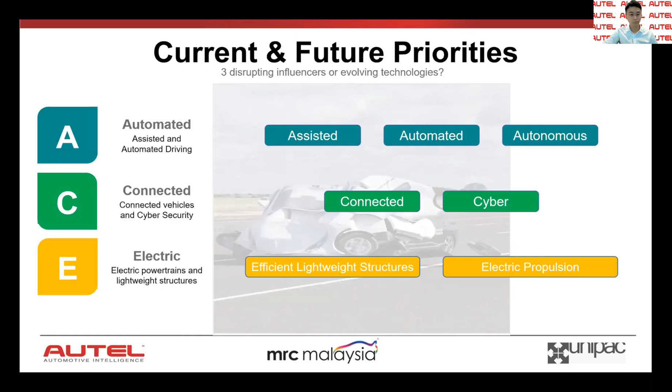Okay, next slide please. So I said this was the future, and this slide is actually about 3 years old now.

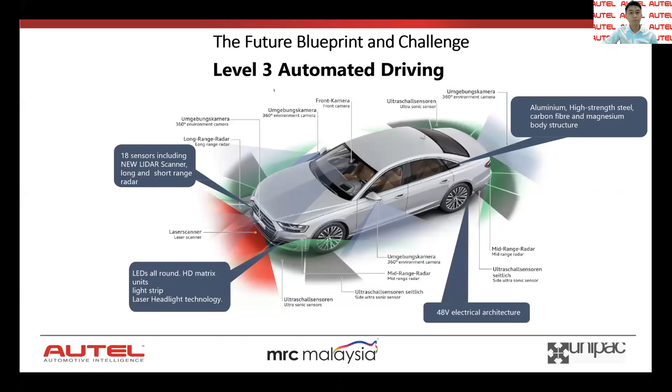So this was like 3 or 4 years ago, and this was the slide we were talking about as the future. However, if we show you the next slide, this shows you that the future is already here. Here we look at two different manufacturers, the most popular in Malaysia by far, Proton and Perodua.

We take two models, the X70 and the Aruz, and you can see on both vehicles they have a heavy dependency on ADAS equipment—whether it's autonomous emergency braking, collision warning systems, lane departure systems, cruise control, or blind spot control. So even the high volume, high consumer vehicles now are being fitted with ADAS equipment.

And why is this important to you as a member of our audience? Well, you're going to learn over the next hour or so why it's important. So we're not now just talking about the Audi A8, we're not talking about prestige vehicles. We're talking about high volume, high selling vehicles that have more and more ADAS equipment fitted to them.

As an insurance company, as a loss adjuster, and as a repairer, you need to understand the impact of that on the claims process and the repair process, and from a consumer's safety perspective. So it's not a case of thinking this won't happen in Malaysia—this is happening here.

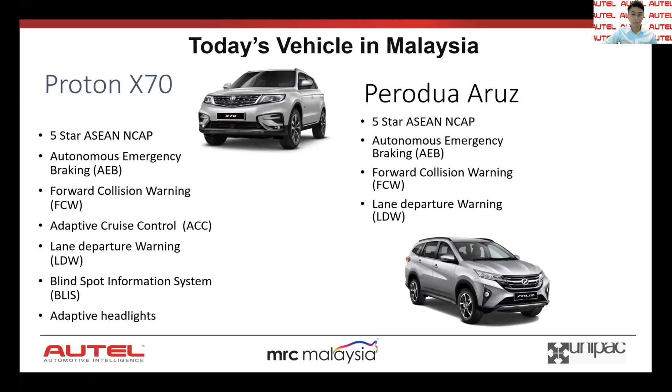Okay, alright, so I'm going to hand it over now. I'll come back later on. The experts are going to take over and explain the need for good repair technology, good repair techniques, and the importance of it in vehicle repair. Okay, all yours. Okay, thanks, Steve.

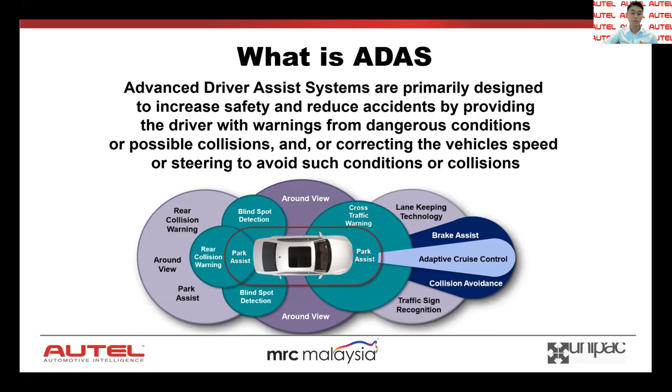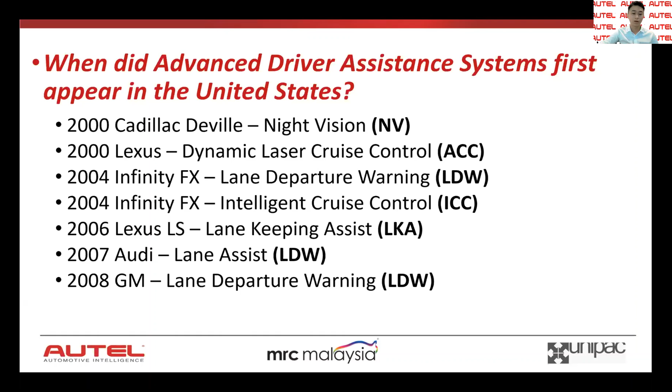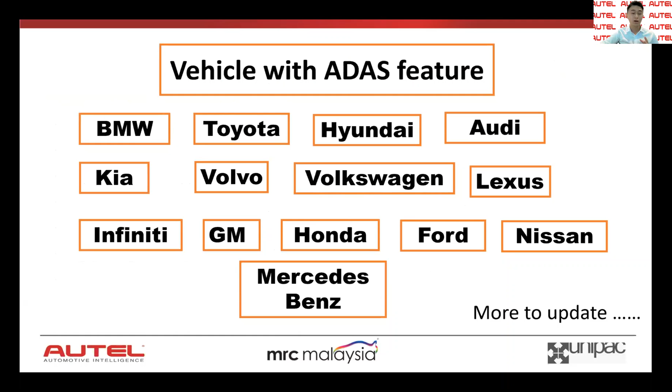A lot of vehicle manufacturers started to equip ADAS features into vehicles. So besides advertising engine horsepower and transmission speed, manufacturers are now actually advertising the ADAS feature to the user. Due to the high demand of ADAS, not only high-spec or luxury brands like BMW, Volkswagen, Audi, Benz come with ADAS system, but even Toyota, Kia, Ford, Nissan, or Proton, Perodua already have ADAS equipped as a standard feature.

From the picture on top, those are the common ADAS features usually equipped in vehicles nowadays. They are lane keeping technology, collision avoidance, parking assist, blind spot, and more.

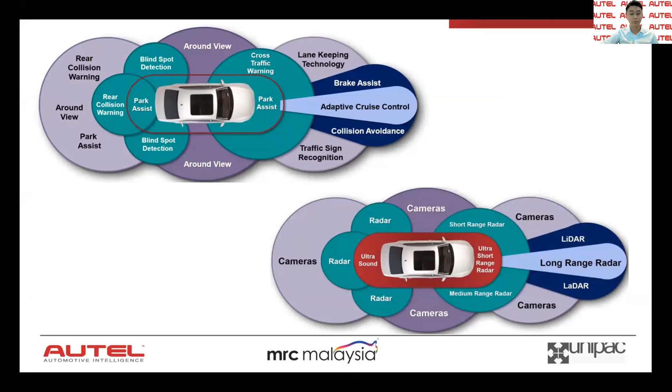Those ADAS features are supported by different types of electrical components, such as you can notice on the lower side of the picture, there are different types of radar in the market. We have short range, mid range, and long range radar. A different type of radar will be used depending on the ADAS feature fitted to the vehicle, and those radars are usually fitted on the front or rear part of the vehicle.

Next, we have the single and stereoscopic camera, an electrical component able to detect the front part of the vehicle. Most of the time, this camera will be fitted in the middle of the front windshield. Then we have the ultrasonic or sonar sensor installed around the bumper, usually in the front and rear bumper. With this sensor, the vehicle is able to detect objects around it, and also a night view camera to detect objects during night time.

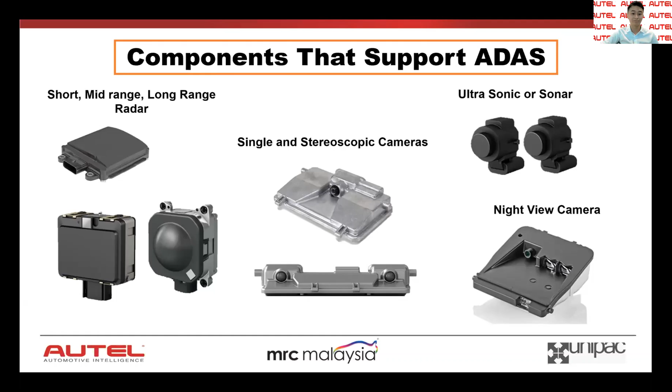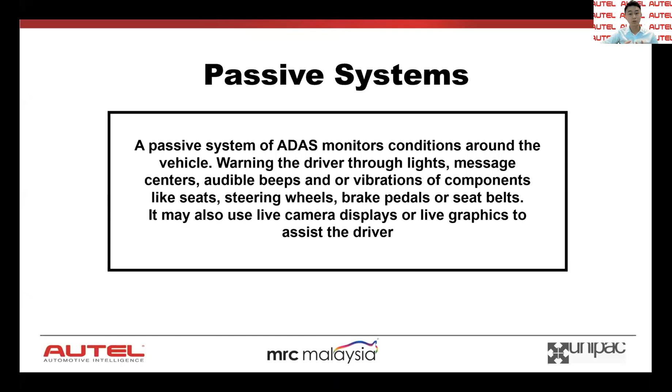Now let's talk about something more detailed about ADAS features. There are actually two categories of system in ADAS feature. One is the passive system. A passive system of ADAS feature means this feature only monitors the condition around the vehicle. It will only warn the driver by creating sound, a message on the display, vibration on the steering wheel, or some will even project the surrounding image to the driver. It only assists the driver; the system will not take any control of the vehicle.

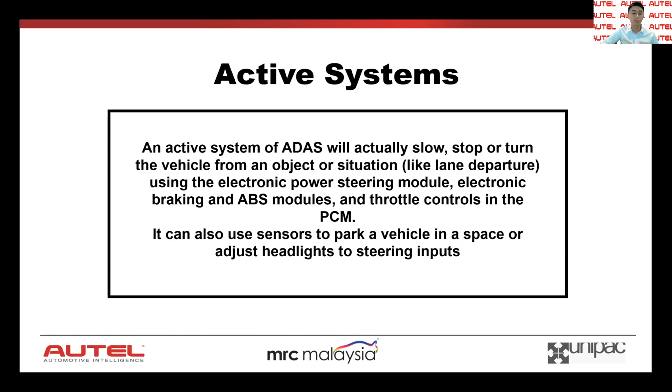Another system is called the active system. This system is a bit different from the passive system. An active system is able to take control of the vehicle. It can accelerate, slow down, or even stop the vehicle by itself. Not only that, some active systems are able to turn the steering wheel by themselves. So that is the active system.

To make everything clearer, I have made a list here. You can see there are two systems: one is passive, another is active. On the passive system, most ADAS features only monitor, guide, and alert the driver. As you can see, there's LDW, which we call lane departure warning, blind spot detection, rear collision warning, front collision warning, around view monitoring, and night vision system. All of these features only monitor, so we call it a passive system. On the active system, most ADAS features are able to take control of the vehicle.

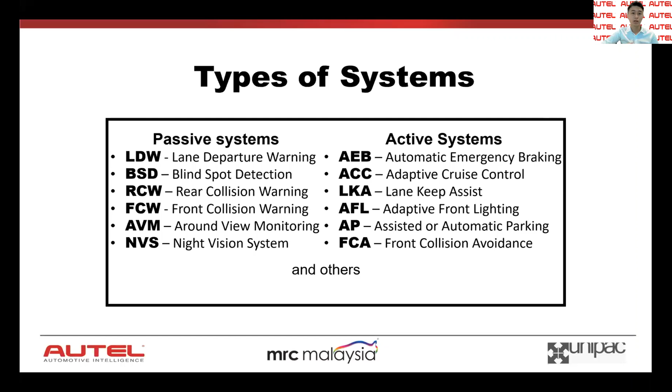It can brake, accelerate, or even turn the steering wheel. So as you can see, there's auto emergency braking, ACC - adaptive cruise control. And then we have auto parking, front collision avoidance.

So now we know that ADAS contains two categories: one is passive, one is active. Now let's talk about some common ADAS features usually fitted in the vehicle and how those features work. Understanding how ADAS features work is very important. Without knowing how the system works, a technician may not be able to repair the vehicle or may even misdiagnose the car.

So let's talk about lane departure warning. When this feature is activated, the front camera will capture the dotted line on the highway. When the vehicle crosses the dotted line, maybe to the left or right, the system will alert the driver by showing a warning sign, creating a beeping sound from the instrument cluster, or vibrating the steering wheel. So this system will only alert the driver - it will not take any action on the vehicle, meaning it is a passive system.

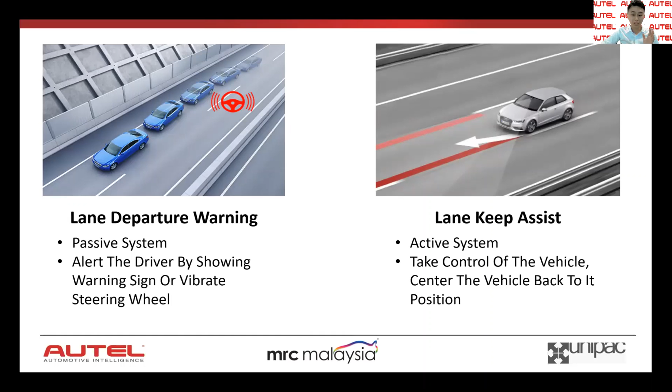On the other hand, we have lane keeping assist. This feature is exactly the same as lane departure warning, but it does not only alert the driver by warning indicator, beeping sound, or vibration on the steering wheel - this feature will take control of the vehicle. It will correct the vehicle's position according to the dotted line, turning the steering wheel by itself to make sure the vehicle stays between the dotted lines, meaning lane keeping assist is an active system.

Next, we have the traffic sign recognition system, a passive system. To have this feature, the vehicle needs a front camera to record the signboards on the roadside. Once the signboard is detected, it will project the image to the driver on the central display or in the instrument cluster. As we've gone through lane departure warning, lane keeping assist, and traffic sign recognition, without a front camera these features would not be able to function. This front camera is usually fitted in the middle of the front windshield.

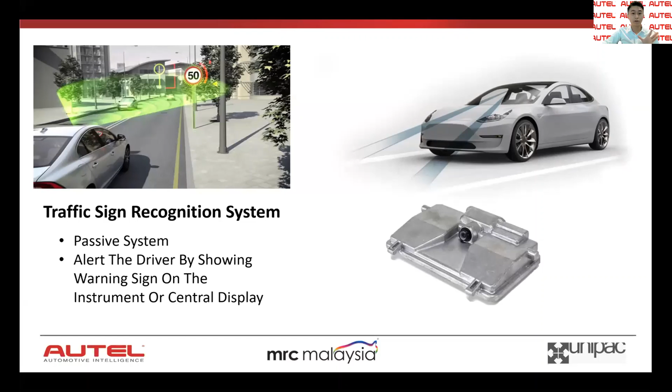Now let's talk about adaptive cruise control, also known as ACC. I guess a lot of people do know about this feature. Most of the luxury brands in Malaysia like BMW, Audi, Volkswagen, or Benz do come with this feature. So how does ACC work? When ACC is activated, the vehicle will cruise by itself according to the speed and distance set by the driver. When an object is detected in front of the vehicle, it may slow down the vehicle by itself. So now you know that ACC is actually an active system because it drives the vehicle by itself.

Auto emergency braking is an active system. This system will constantly monitor the front part of the vehicle. When an object is detected in front of the vehicle that will cause an accident, this feature will alert the driver and will slow down or even stop the vehicle to prevent the accident. Also in Malaysia, I guess Perodua might be fitted with this auto emergency braking, so it's getting more common in Malaysian local vehicles.

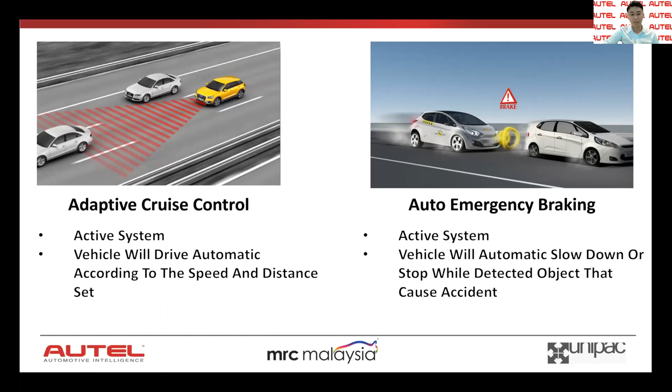But this does not mean that all adaptive cruise control and auto emergency braking systems only use radar as a supporting component - some manufacturers do use a front camera as a supporting component also.

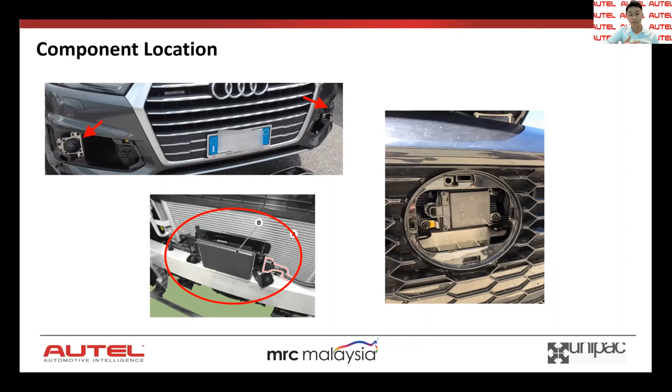Okay, then we have the blind spot detection. Most of the time accidents happen due to changing lanes, because the driver is unable to view certain angles from the rear part, from the side mirror. So car manufacturers add blind spot detection features into their vehicle, by installing two pieces of radar, one in the left, one in the right, usually at the back, so the vehicle is able to detect objects in the blind spot area.

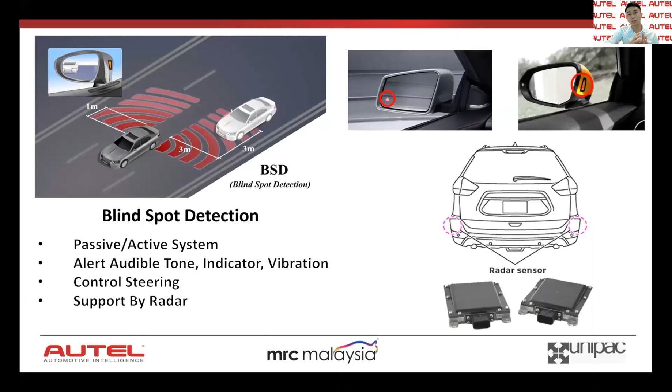It will alert the driver by showing indicator lights on the side mirror or maybe on the instrument cluster. Some even create a beeping sound. Certain blind spot detection features are able to turn the steering or even brake the vehicle. So when there's an incoming vehicle from the blind spot area and the driver tries to cut into the lane, this blind spot detection is able to prevent that, meaning it will turn the steering back or even brake the vehicle to prevent the accident from happening.

And then we have the rear collision warning. This is a feature that will alert the incoming vehicle from the back and also notify the driver that a collision is going to happen at the rear part of the vehicle. They will flash the hazard warning to notify the incoming driver that a collision is going to happen if he does not react. Other than that, showing a warning at the instrument cluster also alerts the driver that a collision is going to happen.

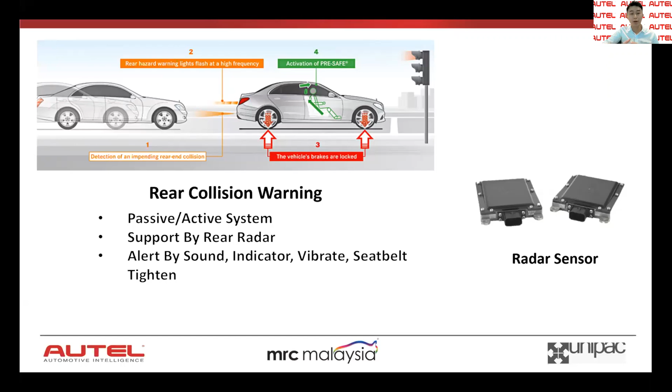Besides an alert from the side mirror or instrument cluster, some rear collision warning systems are able to take action. Once the system confirms that a collision is going to happen, it will hold the brake, meaning it will clamp the brake system. It will also align the driver and passenger seat and tighten up the seat belt. This is what we call collision preparation. By doing this, it's able to reduce injury during the impact. So this is the rear collision warning feature.

And then we have the 360-degree camera, or some manufacturers call it all-around view monitoring. It's one of the passive systems in ADAS. It will assist the driver by projecting the vehicle's surrounding image on the central display. This feature uses up to 4 cameras to support the system: one in the front, one in the rear, and both side mirrors, underneath which they have a camera to make this happen. So there's a 360 view of surrounding images.

And then on the right side, we have auto parking. Most of you are familiar with this because our Proton X70 comes with this feature - the car can park by itself. This feature is an active system, using ultrasonic sensors and some radar to perform it, able to detect surrounding objects. So if there is an empty space that can fit the vehicle, it will park by itself by controlling the steering wheel or maybe the throttle.

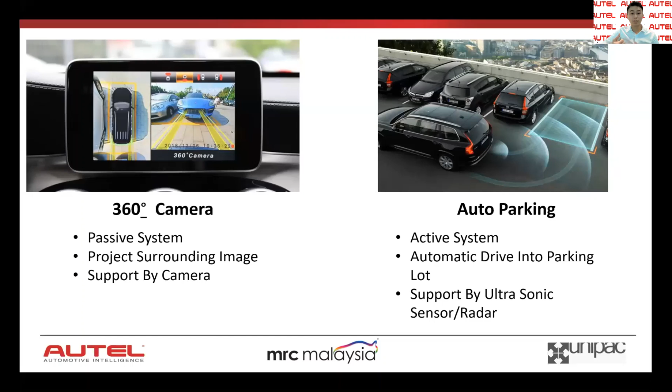And then we have the night vision system, a passive system. This feature is able to project the front image on the instrument cluster or central display. They are using a thermal camera, able to detect objects during nighttime, so the driver can spot objects easier during nighttime.

Then we have the head-up display. It's usually installed in front of the driver, in front of the driver dashboard. This feature will project certain details on the driver's windshield, such as vehicle speed, mileage, navigation, maybe some lane departure message. Different manufacturers will have different kinds of messages.

So we have gone through about 12 common ADAS features in vehicles nowadays. That doesn't mean there are only 12 kinds of ADAS features in the vehicle - actually there are more ADAS features. This is because ADAS is able to provide a better driving experience and also reduce the accident rate, meaning it increases the safety level. This is why ADAS features are becoming more common in vehicles nowadays.

So another frequently asked question: what if the ADAS system fails? What if the supporting component like the camera or radar is damaged or replaced? Do they need to perform calibration? And how do they perform the calibration?

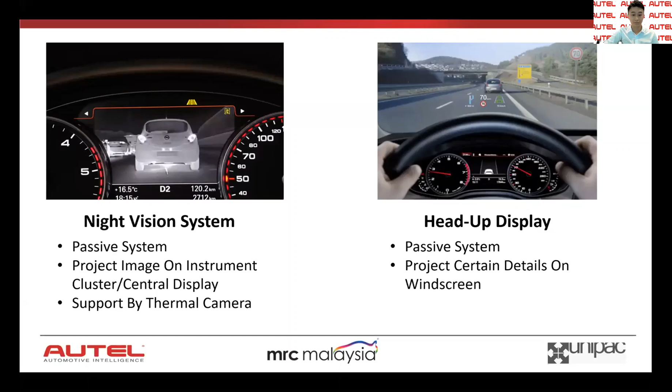Let's make an example here of a camera and radar - when do we need to perform calibration for camera and radar? As I mentioned, the front camera is usually fitted in the middle of the front windshield. So most of the time, when a technician replaces the windshield, he or she might remove the front camera for better access to work. After a long period of removing the camera from the system, the calibration in the camera might be lost, and this will cause some ADAS features to become inoperative.

So by the time we install everything, we need to perform calibration to calibrate the data back to the camera. So what if after we install the camera there is no warning sign appearing on the instrument cluster, or when you do a scan there is no fault? Do we need to perform the calibration?

To make sure the ADAS feature works in optimal condition, we advise performing a recalibration. This is to make sure the system works the same as when it came out from the factory.

Then we have the wheel alignment. A complete wheel alignment needs to be performed before any kind of calibration, to make sure the vehicle steering is straight ahead.

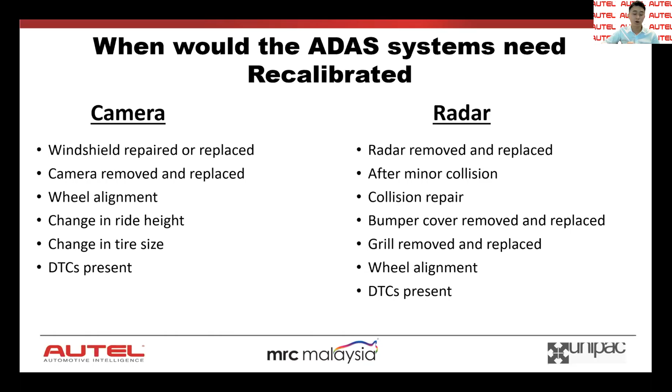Or when we have a minor collision and do a collision repair where we remove the bumper, we need to perform calibration because most of the time the radar is attached to the front bumper, the rear bumper, or sometimes attached to the crash bar.

So what do we need for ADAS? What kind of tools do we need for ADAS calibration? To begin, we need a diagnostic tablet, a scan tool that's able to perform calibration on the vehicle we want to service.

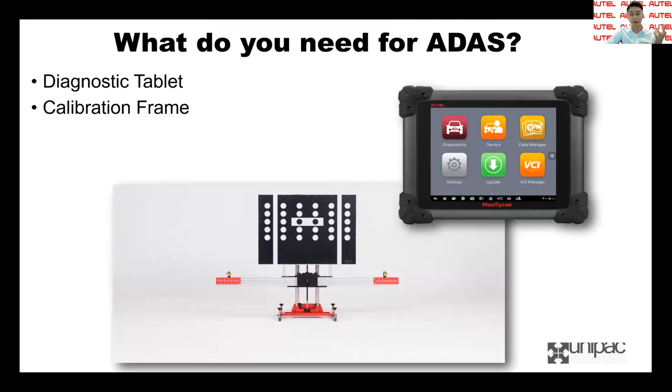Second, we need a calibration frame that's able to hook up the target board, the reflector, the calibration accessory. The third will be the target boards, patterns, and calibration accessories. And last will be the step-by-step calibration procedure and measurement specification.

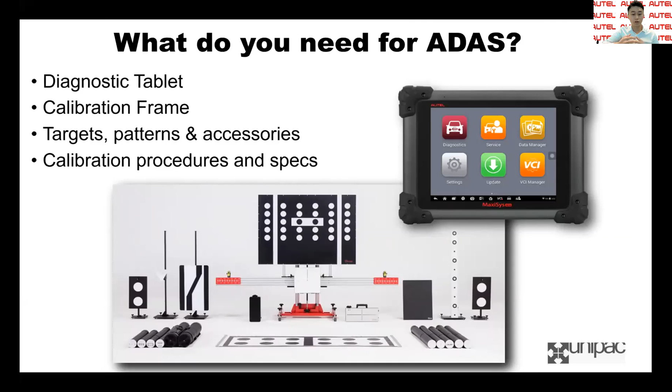In order to perform the calibration accurately, we need all of these tools. The good news is Autel's ADAS calibration system includes all of the above - the step-by-step illustrated calibration procedure with all specified measurements is included in our diagnosis tablet.

So what kind of calibration frame do we need? Most workshops will ask this. If you are performing ADAS calibration in a fixed location, meaning you only perform calibration at your workshop, we advise owning a stationary calibration frame.

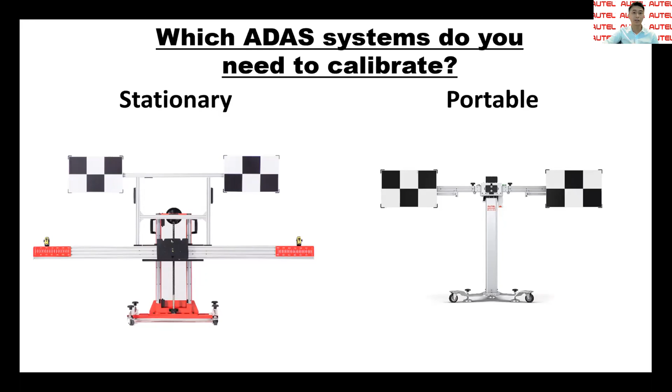Or if you are performing calibration around the state or around the country, we advise getting a portable calibration frame because it's able to be folded and packed into your car and carried around with your vehicle.

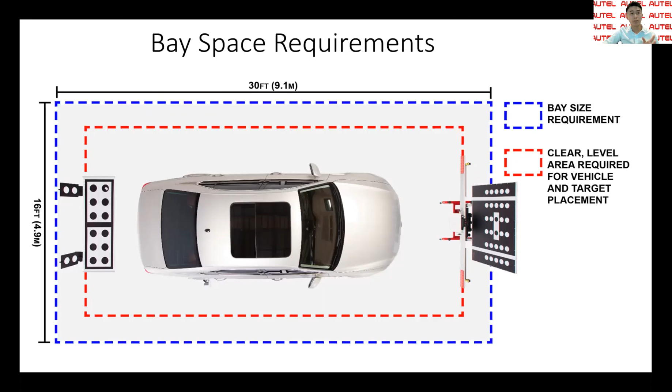Most of the time calibration needs to be performed on a flat surface in an empty space. Every manufacturer has different space requirements - some need a larger space, some need a smaller space. Autel comes with a minimum standard bay space to perform calibration: about 30 feet by 16 feet of empty space.

Besides an empty space, we're also able to perform calibration on what we call a 4-post hoist, also known as the alignment hoist. The only thing we need to watch here is the space in front of the alignment hoist.

Some manufacturer calibrations may need the calibration frame set up about 4 meters away from the vehicle, some need about 2 meters. So we advise customers to prepare at least 2 meters of empty space in front of the 4-post hoist.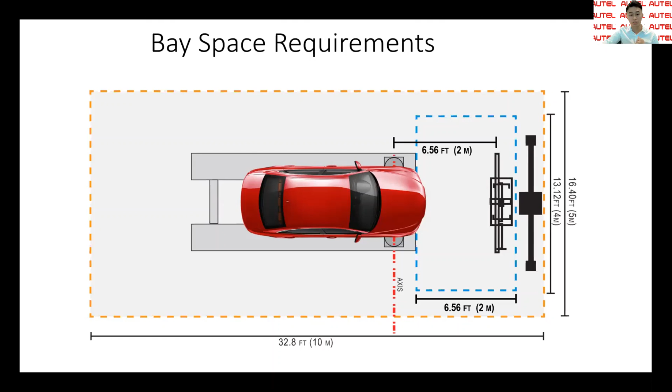What if we perform an all-around view calibration? For certain models like Ford, their all-around view monitoring calibration may require a bigger, larger space - maybe 25 by 40 feet of empty space.

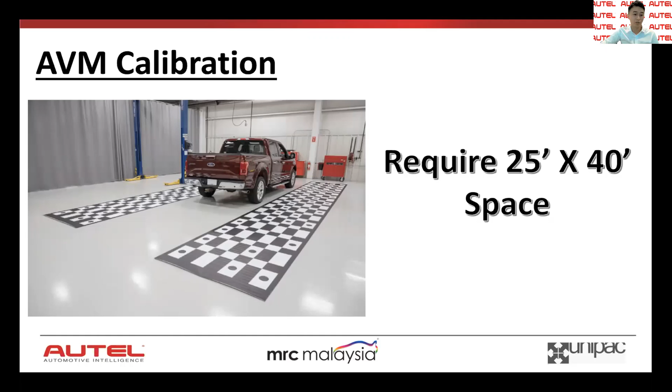A lot of workshops say they don't have this kind of empty space - what can we do? To counter that problem, we can actually perform the calibration outdoors, but we need a flat surface. We need to make sure the road condition is level and flat.

So we've gone through why we need to perform calibration, what kind of tools we need for ADAS calibration, and the space requirements. Now we are going to talk about ADAS calibration methods.

ADAS calibration actually contains two methods - one is called static calibration, the other is dynamic calibration. Static calibration means we perform calibration while the car is stationary. We may need to set up the calibration frame, the targets, the reflector, or other calibration tools at a specified location.

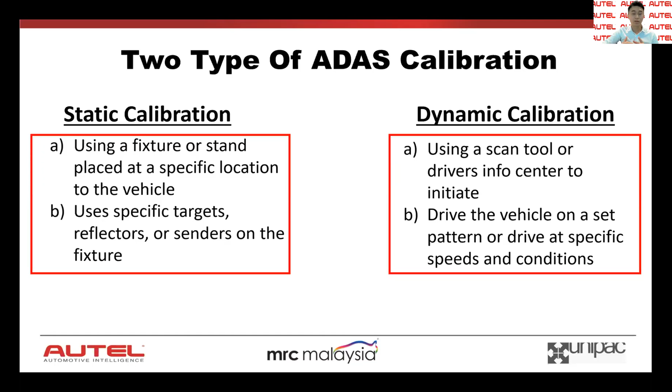Only then are we able to perform the complete calibration - we call this static calibration. Dynamic calibration, on the other hand, does not need any calibration tools. It only needs a diagnostic scanner or scan tool to initiate the vehicle's calibration mode and drive according to the set pattern requested by the scan tool, meaning we perform dynamic calibration while driving the vehicle.

Okay, so when we perform static calibration, there are some important requirements we need to alert. The first thing will be the surrounding lighting. So during calibration, we do not want any strong exposure of lighting on the front windshield.

When there's a reflection on the windshield, the percentage of failing for the front camera calibration will be high. This is because the front camera is unable to capture the target board image. And then the background of the calibration frame must not have any windows or metallic object. We need to calibrate on a flat surface or level surface.

We need to use the correct calibration target patterns and accessories needed for the vehicle, because some vehicles might use different kinds of calibration tools or targets. So we need to alert about it. And last will be the calibration procedure and specification, meaning we need to set our calibration frame how far away from the car and what is the height to set the targets.

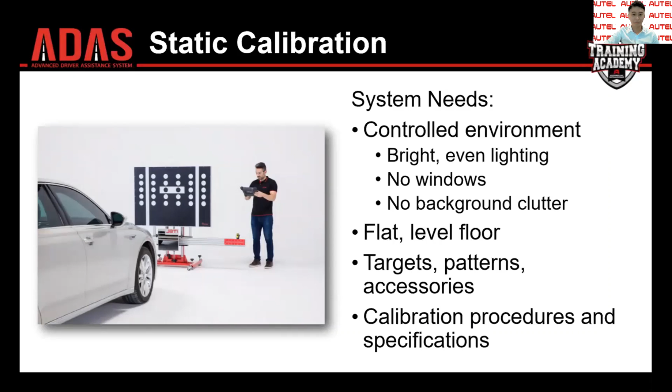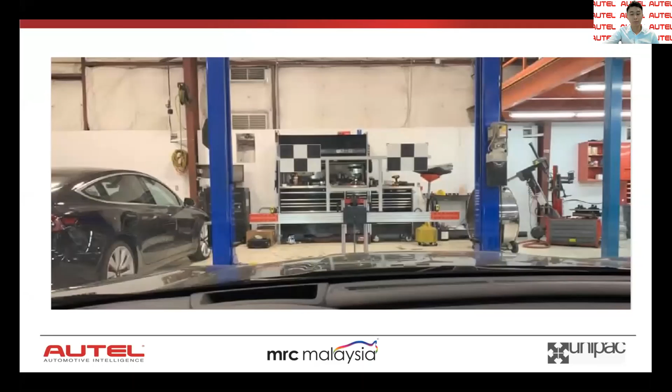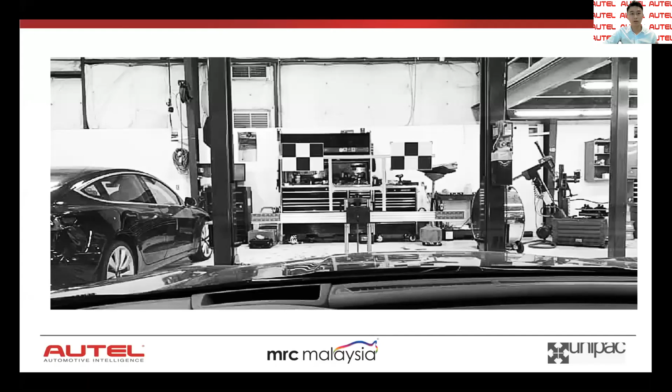As you can see on this picture, this is the image captured when we perform calibration at the front camera. So I guess most of you also have no idea where the actual target box needs to be captured. To handle this situation, what we need to do here is either remove all the metallic fan parts, workbenches, or we could apply a piece of white cloth behind. So we cover the background with a piece of white cloth or panel to make sure there is no metallic object around.

Okay, so how about dynamic calibration? What do we need to alert? First of all, we need to perform dynamic calibration in good weather, meaning not a rainy day, not during nighttime. We need to perform it during the daytime. We need to make sure that there is lane marking on the highway so that the front camera is able to capture the dotted line.

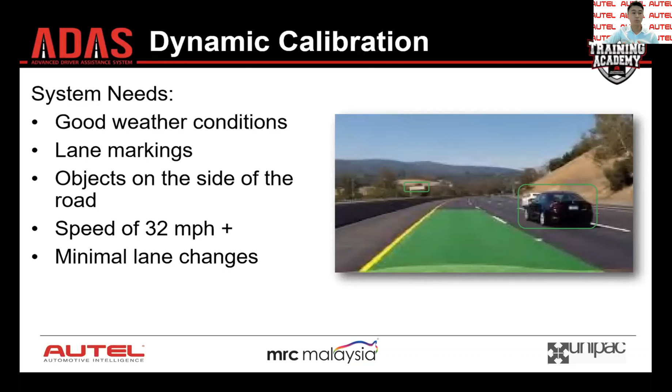Some dynamic calibrations need to detect objects around. So we need to make sure there is a vehicle on the highway, but we should not perform the calibration during traffic hours. This is because there is a minimum speed we need to achieve to perform certain kinds of calibration. Also, we need to minimize lane changing as much as possible.

Okay, so certain brands or models like Honda, Subaru, Hyundai, or Kia need to perform both calibration methods to complete the whole calibration process. Meaning we need to perform static calibration first, and after it completes with the calibration frame, we need to proceed with dynamic calibration.

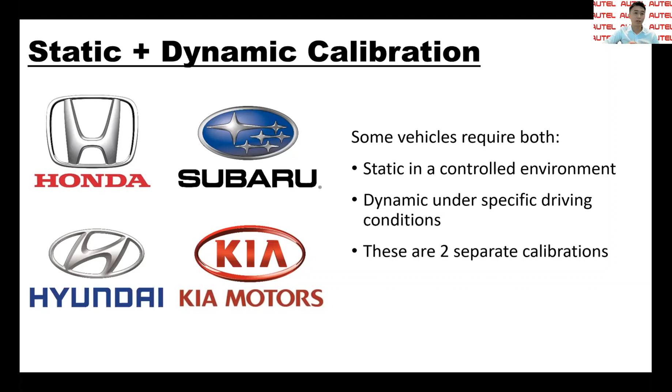We need to drive the vehicle according to the requirements stated in the tools. So there are two separate types of calibration that need to be performed, but it's only for a certain amount of vehicles in the market. Not every vehicle needs that.

Okay, so a lot of people ask, can I perform all the calibration in dynamic mode? They don't want to perform static calibration because they do not have the calibration frame or the target boards. So the answer will be no. All the calibration methods are actually fixed by the manufacturer.

As you can see on the chart, there are 56% of vehicles in the market that need to perform calibration in a static way. 37% of vehicles in the market need to perform calibration by dynamic method. Only 5% need to perform both, meaning after static we need to perform dynamic. And 2% of vehicles in the market can choose either one, static or dynamic.

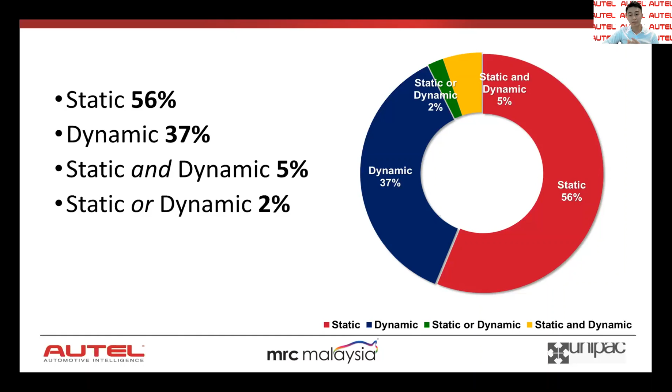Okay, so since I mentioned on the previous slide, there are 56% of vehicles in the market that perform calibration using the static calibration method, Autel does support a high coverage of static calibration.

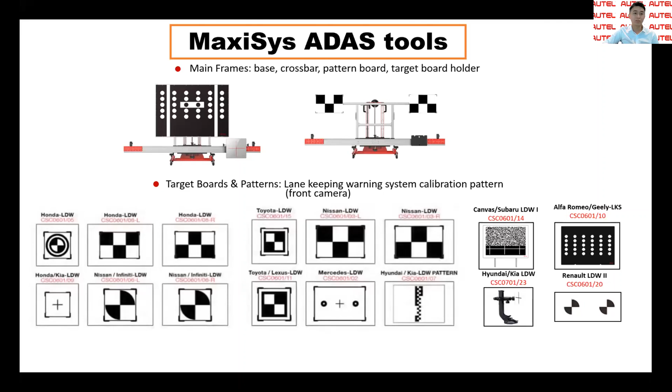We have a wide range of front camera calibration target boards, covering European, US, and Asian vehicle brands. As you can see on the slide, we have Honda, Toyota, Nissan, Mercedes-Benz, Renault, Alfa Romeo, Volkswagen. In the future, we are going to have more kinds of target boards.

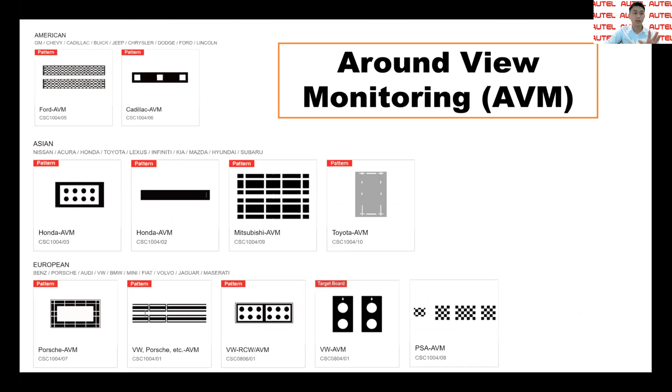We also have the all-around view monitoring calibration patterns, known as 360-degree calibration, for Porsche, Volkswagen, Toyota, Mitsubishi, and others. And for rear collision warning, we also have Mercedes-Benz and Nissan.

We also have different types of radar calibration tools, with huge coverage of Volkswagen, Porsche, BMW, and then Nissan and Japanese vehicles like Toyota, Honda, Kia. So there are different types of calibration tools for different types of radar.

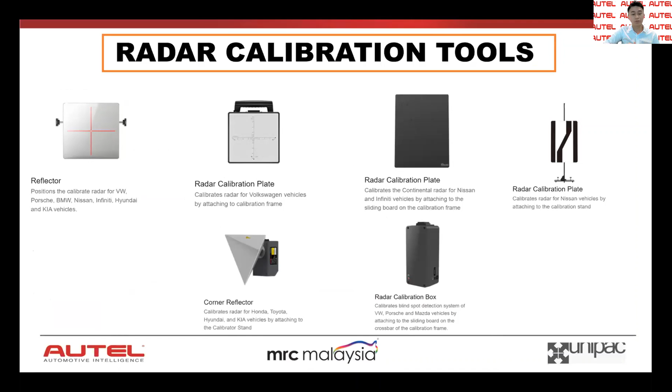We also have the night vision calibration for Mercedes-Benz, VAG Group, and GM. And we have the four-wheel alignment calibration aids, the wheel clamp and laser targets.

As a conclusion, the ADAS feature acts as an important safety system in vehicles nowadays. It's able to reduce accident rates by alerting the driver or even taking action during an emergency. So when there is a fault related to an ADAS feature, as a professional technician, we need to inform the owner about the importance of the ADAS feature because it does affect the vehicle's safety level.

As a professional technician, we need to use proper tools to perform the calibration the correct way. ADAS is a very common feature, and I think in the coming years, as well as recent years, it's become very popular. So that is all from me for today.

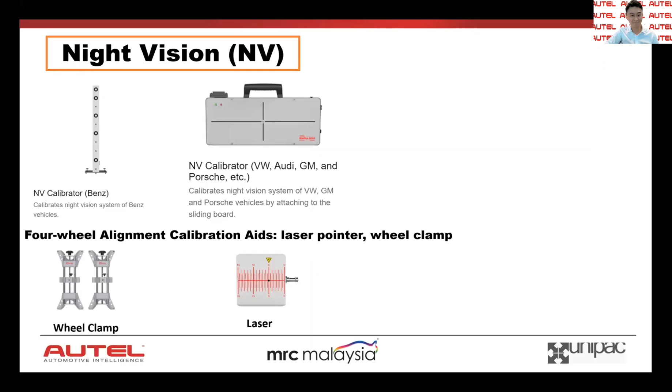Thank you very, very much. I hope that was quite a comprehensive overview from a very, very dedicated equipment supplier who can deliver what needs to be delivered with regards to calibration. We tried not to go into too much technical information, and we actually have a training course that goes through it in more detail. But what we wanted to do was show you some of the depth and the differences between the types of calibration and the equipment that's needed in order to facilitate a safe repair.

I've now just got literally 3, 4, or 5 slides going through some of the consequences of this, and what repairers and insurance companies need to be aware of in order to ensure that the vehicle is repaired safely. So as far as a vehicle repairer is concerned...

The first thing is that they need to have knowledge - knowledge that the vehicle is equipped with ADAS to begin with, and knowledge of what type of ADAS equipment is on the vehicle. As was very clearly defined, there's a massive difference between different manufacturers. I'll cover this in my next slide, but from an insurance company perspective...

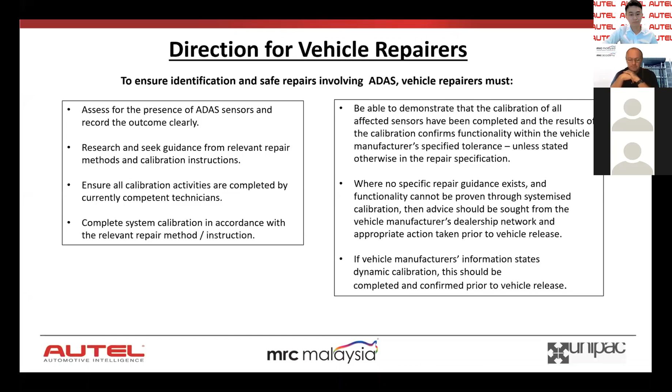Next slide. So from an insurance company perspective, I've been watching this develop in other markets over the last few years. One of the perspectives that an insurance company takes is the responsibility of a safe repair.

Now, I've lived in Malaysia 21 years. I've been in this industry 21 years in Malaysia, so I know the market very well. I understand we're in a tariff situation, and I understand there is tremendous pressure on controlling claims costs as well.

However, having said that, an insurance company has a social responsibility to make sure the vehicle is repaired correctly, so that when their policyholder gets back in the vehicle, it's as safe as it was pre-accident. The recording, the measurement, and the data recording of understanding and carrying out the calibration is so important.

So you need to know within your repairer network, as an example, which one of your repairers can calibrate a certain manufacturer, can they calibrate multiple manufacturers, et cetera, so that when you're triaging or directing the vehicle to be repaired, you know that that repairer has the capability to repair the car correctly.

And you need to be able to support your network with this. You know, repairers, unless you're the manufacturer, the independents don't really have the guidance and the support and the confidence to be able to say, yeah, okay, we need to invest in this equipment, we need to invest in this training, and we need to be able to provide a record of that calibration taking place back to you as an insurance company. And so it's this education, and this is why these webinars are existing. It's not just about telling you about equipment, telling you about the different types. It's about the consequence and the responsibility that we've got to make sure that this vehicle is repaired safely and correctly before it goes back to the policyholder.

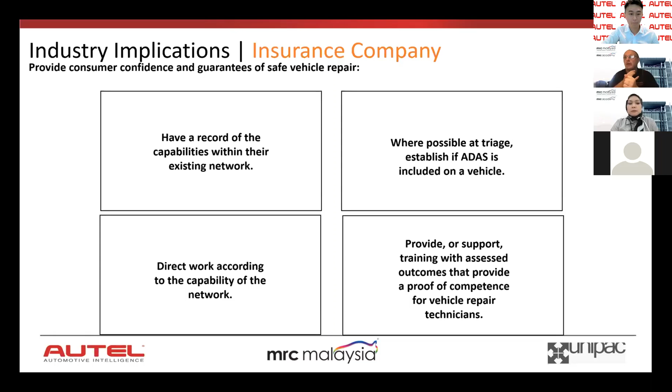So again, we've launched repair methods. Our repair methods are available. In there, it tells the repairer what types of calibration on the vehicle and the times that are in the audited software houses that come from us include that ADAS time on a lot of the vehicles. As an example, the X70 that we've recently done the repair times for. So it's very important that you have an awareness that if a repairer is putting on his estimate the need to calibrate the vehicle, then that's something that does need to happen. It's very, very, very important.

Okay, next slide, please. So I mentioned earlier about the consequences, and that's not just the consequences of ADAS, it's the consequence of automated driving as well. We're moving into an area that is an unknown for insurance companies. And one of the big issues regarding ADAS equipment is liability. And where does the liability sit in the event of a further accident into that vehicle that's been repaired?

And, you know, so I'll give you a really good example. Let's say you're driving a Volvo XC90 and you have an accident and the windscreen and the front bumper need repairing. And in both those, you've got the camera and the radar technology which controls the autonomous emergency braking. Now, if those are not calibrated correctly, and the vehicle drives out of the workshop and then is in another accident because the braking didn't activate because it wasn't calibrated correctly, then the question is where does the liability sit? Is it with the repairer who hasn't calibrated the vehicle correctly? Is it with the person or the organization that's paying for that repair? You know, these are all very, very gray areas that nobody globally has sorted out yet, but they are coming.

And so one of the things, as an example, in the UK, what they did 10 years ago is they basically made it a process for any repairer that's doing insurance work or insurance claim work, that the repairer had to sign process documents that they had done the repair to the correct method and the correct specification. So what that did for an insurance company is gave the insurance company the comfort that as far as they're concerned, their liability now is actually pushed onto the repairer, because the repairer has stated that they have done the work as per the correct method and the correct processes.

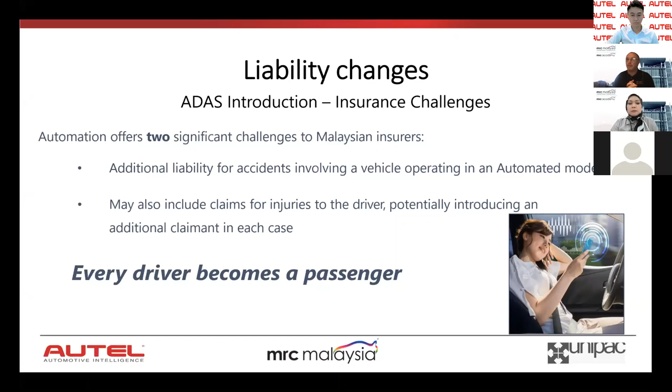Okay, so where do we fit in? This is our little pitch.

As you know, we provide the repair times and parts price data currently to approved and audited software houses, allowing insurance claims to be accurate, detailed, and giving that sense of comfort that the times being requested by the repairer are correct.

But what we've done recently is also expand that to include repair methods. The screenshot shows one example of a method on a BMW 5 Series, where it shows the repairer where the ADAS equipment is located, the type of ADAS equipment it's got, and then the repair process needed to either replace and recalibrate that equipment. So this is all included in the methods.

Now, again, from an insurance perspective, something that needs to be considered is that if this vehicle goes back to BMW, there's a very high chance that BMW will have the manufacturer's information for this vehicle and be able to do this. The issue with an insurance company is that the independent network probably won't have the information to that OEM specification.

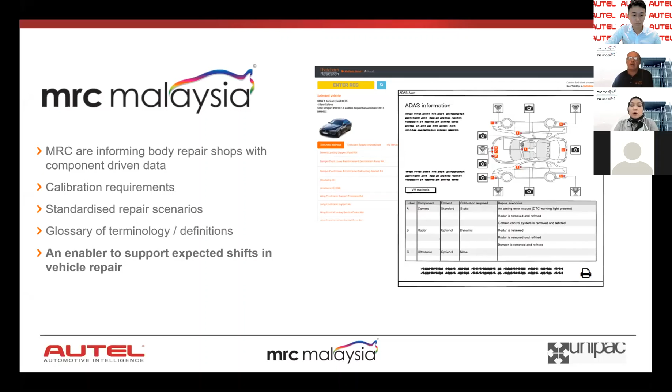Okay, so this is actually my last slide. It's kind of a conclusion of what I've been saying over the past few minutes and at the beginning. Every single insurance company's got lots of repairers, whether independent, franchise, dealers, etc. But the underlying delivery of service for your customer, the policyholder, is to make sure that vehicle is repaired with high quality and safely.

And the time is coming where you need to be supporting those repairers to allow them to invest, to almost expect them to invest in the equipment needed to repair these vehicles. This is not like 10, 15, 20 years ago. We need this equipment, we need this training, and we need this knowledge, and we need the accreditation to make sure these vehicles are being repaired using the correct and modern equipment, the correct tooling, the correct materials, so that you have the confidence to say to your policyholder, when you get the car back, we can guarantee it's safe.

We guarantee the repairs. We can show you the certification of repair, et cetera. So from an insurance company perspective and from a loss adjusting perspective, it's not simply about controlling that cost of repair anymore. We have to focus on the safety and somehow allow that safety element and safety responsibility to be part of that repair process and part of the repair cost.